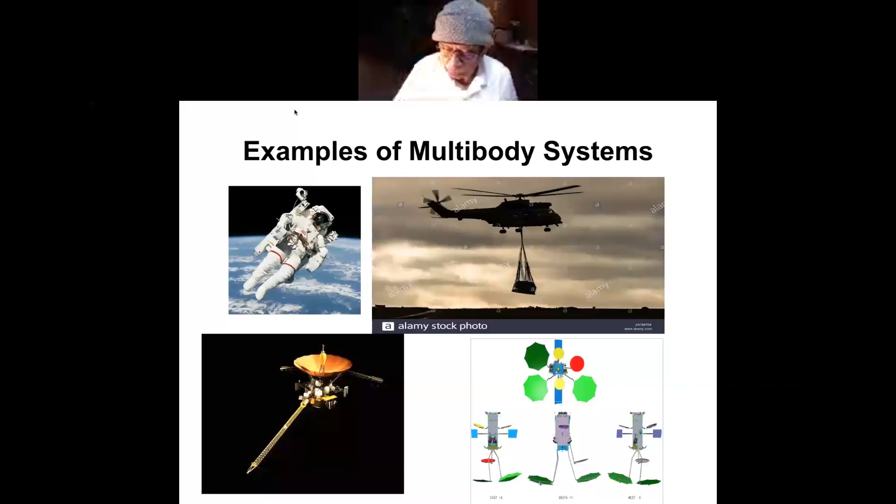So the next one I show: the main work of a dynamicist is that of formulating equations of motion of complex spacecraft. And the reason for that is before they are actually sent out, one has to know how it will behave. To do that, one has to simulate the motion of the system, and that means writing some differential equations, the solutions of which will show that behavior.

I mentioned here several methods that can be used to derive these equations of motion. First, I call the momentum principles. All it does is write the time derivative of the linear momentum equal to the force, and the time derivative of the angular momentum about the system mass center equal to whatever torque is applied to the system. So tracking the mass center of the motion is important. This is not necessary otherwise, because we have to take the moments about the system mass center.

In D'Alembert's principle, it is the same as the momentum principle, except that, as D'Alembert said, the force minus mass times acceleration is a zero-sum vector, and similarly torque minus the inertia torque is also zero. So these zero-sum vectors, because they are actually zero, the active force and inertia force - you can take the moment of zero about any point. That's the importance. You don't have to take moment about the mass center. So tracking of the system mass center is not needed.

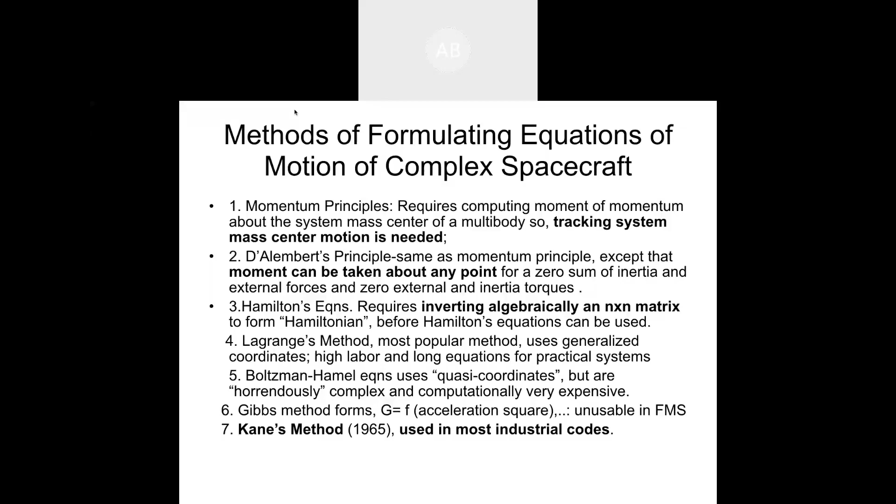Now, the example that I showed you, that I'm working on, with 6 reflectors and 2 solar panels, that has got 37 degrees of freedom. So remember, you have to invert this 37 by 37 matrix algebraically. That's a huge task - it will take pages and pages and pages. So this is practically useless.

Lagrange's method is the most popular method used in many places. But if you take up a complex problem, as I'll show you soon, the labor involved is horrendous, and the equations also have to be stretched out over many pages.

Boltzmann-Hamel equations are a special version of Lagrange's equations, where instead of using generalized coordinates, one uses quasi-coordinates. The meaning of quasi-coordinates is that the integral of these quasi-coordinates is not a generalized coordinate. So it's a linear combination of the time derivatives of the generalized coordinates that is called a quasi-coordinate. But this method is the most complex, if you see the steps involved in what is required. So this is computationally very expensive.

And the sixth method is due to Gibbs. Some people call it the Gibbs-Appell equation. And here one has to form a Gibbs function.

It is a function of the square of the acceleration. Now imagine you have a multi-body system and you have to compute the acceleration at one point in one body. It will have terms from the previous bodies also, so it will be a huge expression. Gibbs says, well, first form the square, and then it's a function of the square of the acceleration, and then he will differentiate it with respect to the quasi-coordinates of Boltzmann-Hamel.

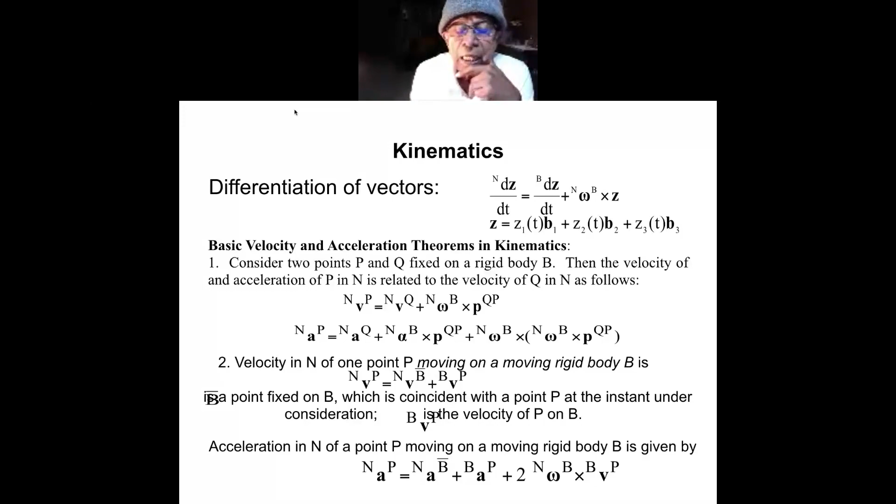The ant is moving, so it casts a shadow on the body B from time to time. Those shadow points are actually points of B, that's why I put a bar to say it's the velocity of the image point with respect to the Newtonian frame. Again, if you want to know the acceleration, you differentiate that with respect to the fundamental theorem on differentiation of vectors. You will get the last line, where the third term is recognizable as the Coriolis acceleration.

Then in the next slide, before I move on, I should say that kinematics is the most difficult part in dynamics. There is a lot of kinematics that I didn't go over, like how the angular velocity is expressed, I did not go over these things.

So suppose you take up this example: one rigid spacecraft G, which has 3 reaction wheels, W1, W2, W3, and it has got a nozzle for a thruster. FTh is the thrust force that the spacecraft needs to move.

And then there is a mass spring dashpot system, which you can think of as a particle moving over this moving body. As the mass spring dashpot causes the particle to move, that provides a case for a point moving over the moving body G. And then this slosh, fuel slosh, is shown as a pendulum attached to the axis of the spacecraft.

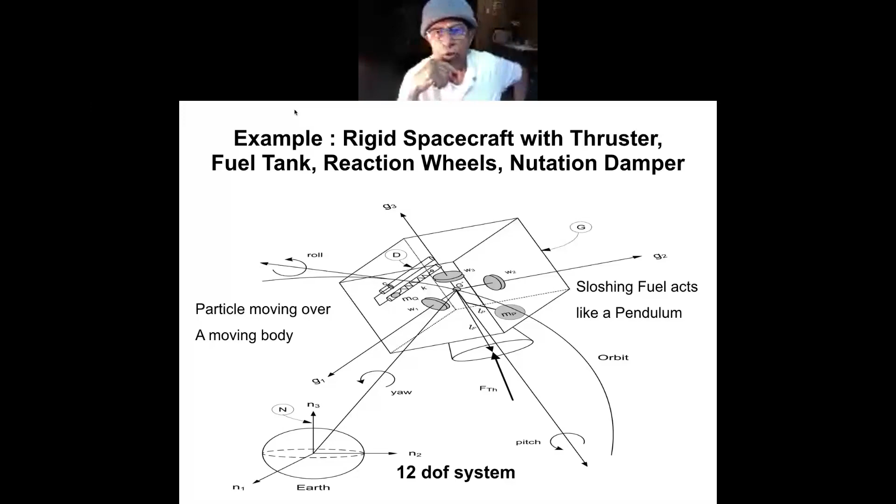Before I change the slides, I should tell you that these reaction wheels, W1, W2, W3, are used to control the attitude of the spacecraft. The spacecraft drives the wheel by a torque, and in return the wheel provides the reaction torque in the opposite direction - that's why it's called a reaction wheel. The spacecraft drives the wheel by a motor, and the motor frame, being the spacecraft, gets a reaction torque. So if you have three wheels, you have three-axis torque on the body, which is sufficient to change the orientation of the body.

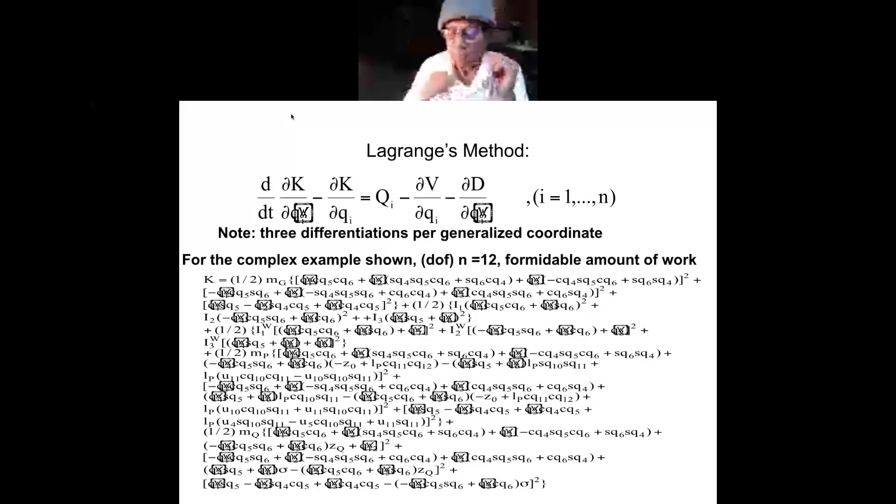So Lagrange's equation is a bad way to go for a large problem. In contrast, in other words, you cannot solve the problem with Lagrange's equations. If you use Kane's method, you will get the result. And I've given some nice examples.

Suppose you have a pencil which is spinning about the axis of the pencil. In the example problem that I have, we wrote a paper on this.

The minimum axis of inertia is B2, the second axis of the body. Now, if you spin it about the minimum axis of inertia, which is along the length of the pencil, then due to dissipation provided by the nutation damper, the spinning pencil will start to slant, forming a cone. The cone will increase, just like a symmetric top, and finally the pencil will fall down onto the ground and start rotating on the horizontal surface.

So for the minimum axis of inertia, you start the spin, but the object is unstable and goes from spinning about the minimum axis to the maximum axis, which is the transverse axis of the pencil. So it will start rotating on the flat plane, turning about the maximum axis.

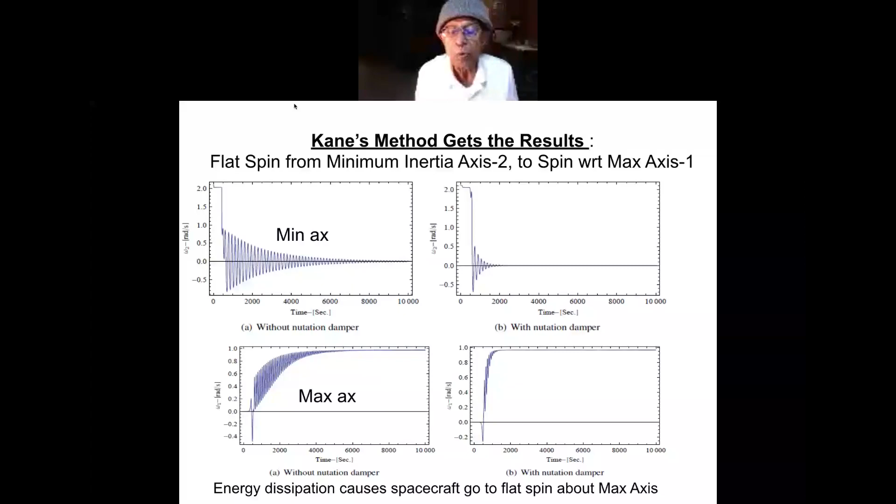If there is no nutation damper, it takes a long time to reach its final spin rate. If there is a nutation damper, the final spin rate is reached sooner, and energy dissipation causes the spacecraft to go to flat spin about the maximum axis. This is a very interesting result in spacecraft dynamics.

Sometimes, when you carry fuel, the fuel invariably has a viscosity, so there is damping inherent in it. So you do not specially need a nutation damper to get this kind of behavior. This was predicted in 1965, and it indeed happened.

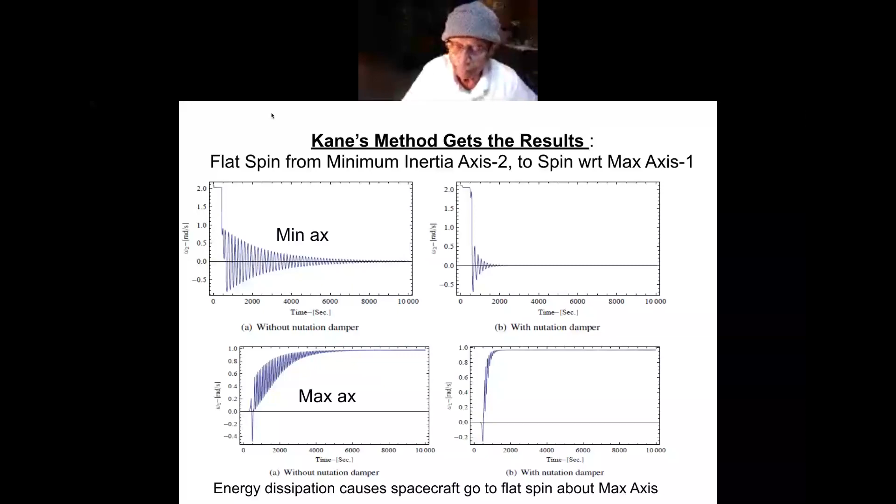Now suppose you want to reorient a spacecraft from one direction to another. To do that, you have to write these equations of motion for the system and solve it, and then it will teach you how the system will behave.

Suppose you want to maneuver the system from when it is rotating about a maximum axis, which in this case is axis 1, and axis 2 was the minimum axis of inertia. Suppose you want to turn the spacecraft from rotating about maximum axis 1 to rotation about maximum axis 3. So basically, you are requiring a 90-degree turnover.

The solution of the differential equations describing the equation of motion produces these three curves: how the maximum axis inertia behaves, how the medium axis inertia behaves, and how axis 2, the minimum axis, behaves. Axis 2 falls into flat spin, so its magnitude is 0. The 90-degree rotation is shown here.

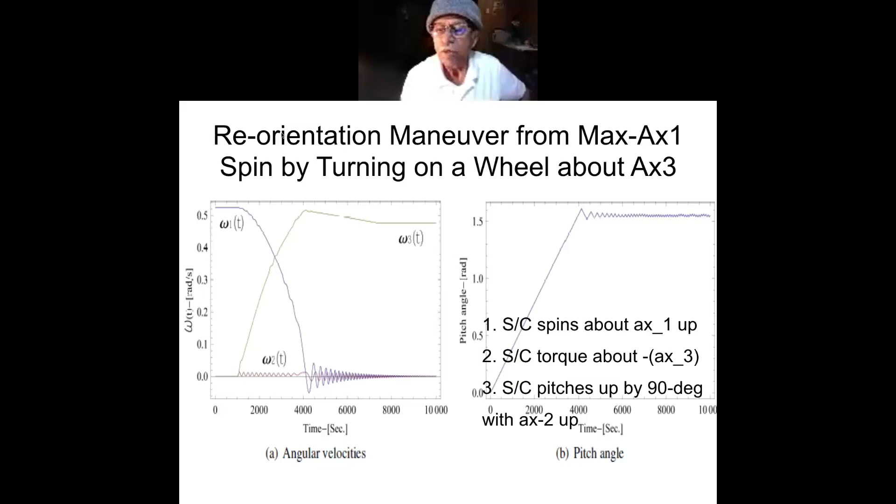The spacecraft first starts spinning about axis 1 with axis 1 up, then a torque is applied by the wheel. This is done by turning a wheel on. If you turn the wheel on in a certain direction, the wheel will impart a negative torque onto the spacecraft. So by turning on the wheel about axis 3, the spacecraft torque will be applied in the minus axis 3 direction.

The spacecraft pitches over by 90 degrees and reaches axis 2, which will eventually make it fall down. All these things were predicted by the simulation.

Next, I wanted to show that Lagrange didn't get the solution, but Kane's method did give the solutions. I want to tell you what Kane's method is.

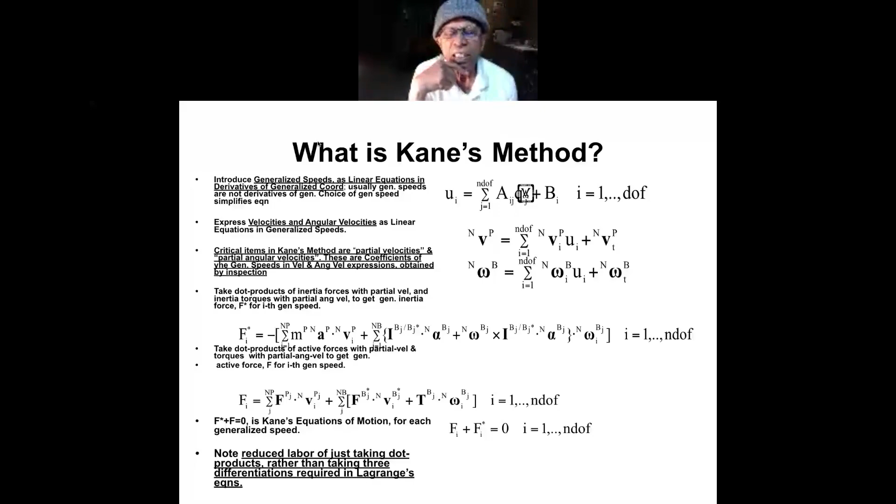Kane's method starts by defining a quantity he calls generalized speed. Lagrange uses generalized coordinates. Kane uses a speed-type quantity, using the symbol U, with subscript I indicating how many degrees of freedom are in the system. For this spacecraft with a nutation damper, 3 reaction wheels, and a sloshing pendulum, we had 12 degrees of freedom, so you introduce 12 generalized speeds, U1, U2 through U12.

Having introduced this generalized speed, here is the relationship: UI, the generalized speed, is a linear combination of the Q dot terms. So AIJ times QJ dot, plus some other term B, which does not contain QJ dot. Whatever contains QJ dot is AIJ QJ dot, plus B, and this is equal to the ith generalized speed.

Kane says to form the velocity of the particle using those generalized speeds, and it will be seen that if you express the velocity of a point P, it will be the generalized speed times a certain quantity, written as VPI with respect to n. This quantity VPI is called the ith partial velocity of P in n.

This is a strange creature. It is the coefficient of the ith generalized speed in the velocity expression. So if you write the velocity expression involving these generalized speeds, you get terms with U1 through U12, etc. The coefficients of U1, U2, U3 are what Kane calls the ith partial velocity, if you collect the terms in the velocity expression having to do with UI.

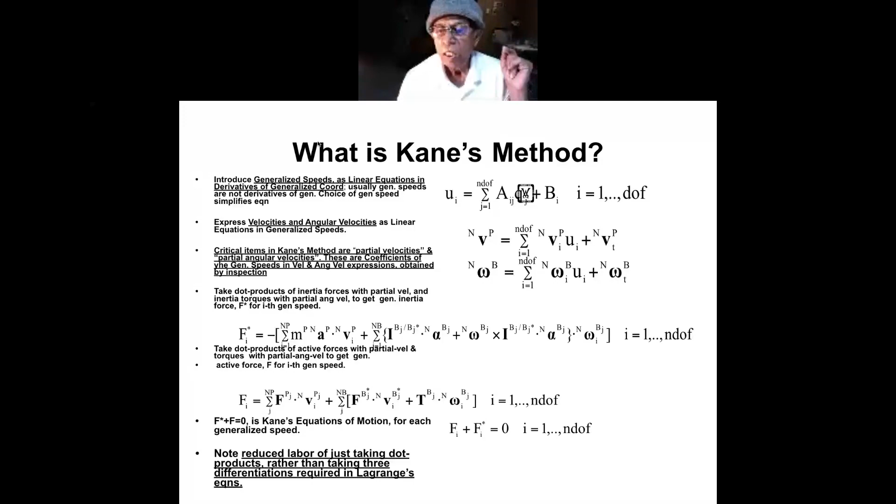You just take dot products to form the generalized inertial force and generalized active force, and you have to remember how you form the partial velocity. These are the coefficients of the generalized speeds in the velocity expression. Partial angular velocity is the coefficient of the generalized speeds in the angular velocity expression, and the generalized speeds themselves are formed as a linear combination of the q dots.

So this is all about Kane's method. I'll show you now. Again, this time I take up the role of a teacher who wants the students to know the idea behind the methods. So here again the thing was all messed up.

Q1 is equal to, I take, here is this angle Q1 and there is the angle Q2. So I say, well, I'll take the first generalized speed as Q1 dot, this Q1 dot. The second generalized speed - you can say, well, I had initially told you that the integral of the generalized speed is not the generalized coordinate. I have violated that rule here, but wait and see.

Now I define the second generalized speed as Q1 dot plus Q2 dot. If you see that if I integrate U2 and if I integrate the right hand side, it will not be Q2 dot, but it will also have a Q1 dot. That is why this is called a non-integrable generalized speed.

So from these two equations, you can get the time rate of change of the generalized coordinates Q1 dot, Q2 dot. And one rule for experienced dynamicists is that you make the generalized speed expression as complicated as you can. It will pay off later - you'll get very simple equations. I won't go into that now.

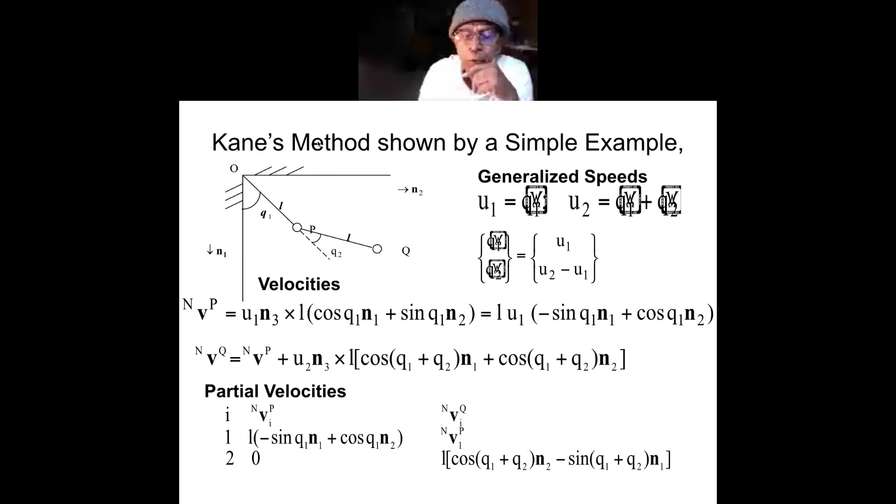Now, if I want to know what is the second partial velocity of Q, in this expression for Q, which contains this plus the big one, the first term from velocity of P does not contain a U2. However, U2 is present in the expression for Q, and the coefficient is N3 crossed with this quantity. That is what I've written as the second partial velocity of point Q. So Q has a first partial velocity and a second partial velocity, because there are 2 degrees of freedom - I is the degree of freedom. P has only a first partial velocity, no second partial velocity.

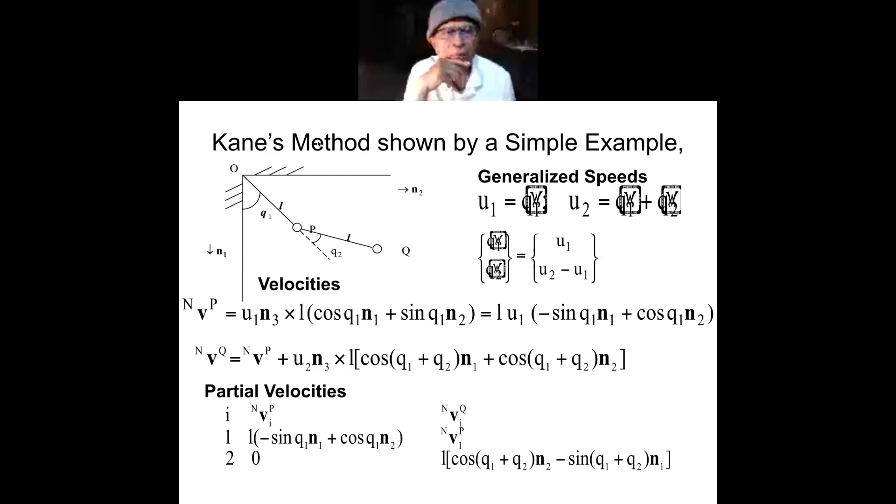Now, to proceed with Kane's method for this 2 degree of freedom double pendulum problem, first Kane says find the accelerations. So I just differentiate the velocity of P and velocity of Q, remembering the theorem that I said is the most important theorem of vector differentiation.

This, and then the generalized inertia force. The first generalized inertia force is the inertia force on P dotted with the first partial velocity of P, plus inertia force of Q, because remember there was a summation in the definition.

So inertia force on Q dotted with the first partial velocity of Q. These quantities that I formed in the table, the partial velocities. Similarly, for the generalized inertia force corresponding to the second generalized speed, it is inertia force times the second partial velocity of P, then again inertia force on Q times the second partial velocity of Q.

So step 2 forms the generalized inertia force. Step 3, first you have to know the forces. The forces are due to gravity on particle P and particle Q.

Now, generalized active force is called the force on P multiplied by the first partial velocity. If you want to form the first generalized active force, then multiply this system with the first partial velocity: force on P times the first partial velocity of P, force on Q times the first partial velocity of Q.

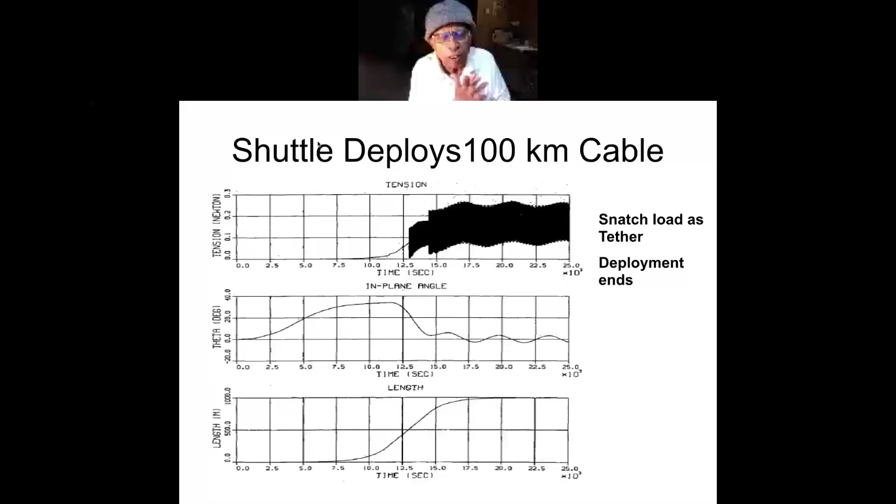And the tension, you see, goes, and then later there's a shady kind of band. Why? Because as you are bringing it closer, Earth's gravity wants to pull the satellite down. So you have to pull back, as though you don't want to let it go and let gravity grab it. So you are applying a brake, as though you are hauling it, putting tension onto it to bring it back. That's why there is a hash mark there.

So this is the snatch load. You're bringing it in as though you are braking it. You don't want to let it go away due to the pull of gravity. You want to bring it in. So in the beginning, there is not much, the gravity is not strong.

But towards the end, as you come closer, and in the previous version I showed, I have modeled it with many particles. As it changes from 5 particles to 4 particles to 3 particles, there is a snatch—I'm changing 5 to 4, 4 to 3, etc. So the tether tension behaves like this. Physically, you can think of it as pulling on it so that it does not escape.

Now, here I show the tether satellite retrieval. If you have played with a yo-yo, you will see that if the ball at the end of the string swings, then when you try to bring it in, the ball will try to wrap up on the wheel of the yo-yo.

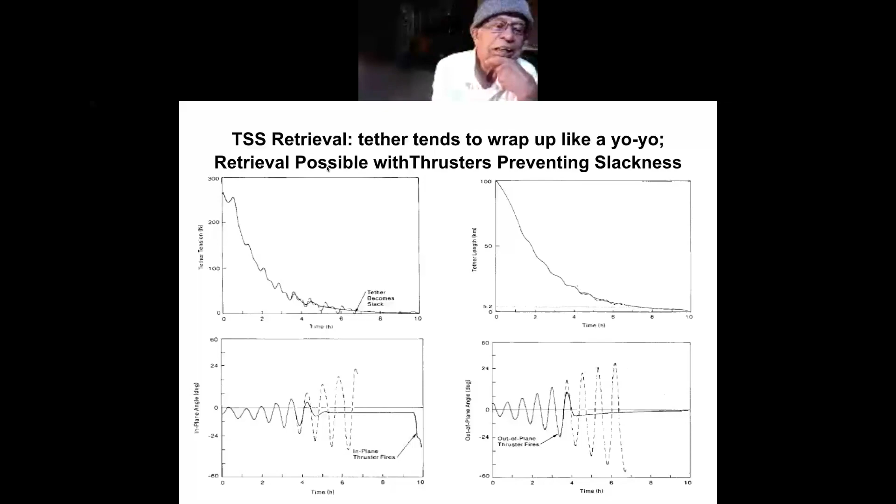Okay, so this is about tethers. Then another thing that I did was, again, based on reading Kane's book. I read Kane's book when I was at Florida. My teacher was a former student of Kane who was not a good teacher, he was just essentially copying Kane's class notes. But the good thing he did was he prescribed Kane's book.

And we had a small room. I had a small table with a table lamp. I can tell you, I did all the problems in Kane's book, and that's how I learned. So anyway, here's the problem.

The solid rocket booster was used in those days to push up a satellite. On top of the solid rocket booster, these satellites used to go, and after launching the satellite, the booster would fall into the ocean and be smashed into pieces because the water behaved like solid stone when the rocket falls from 60,000 feet or so.

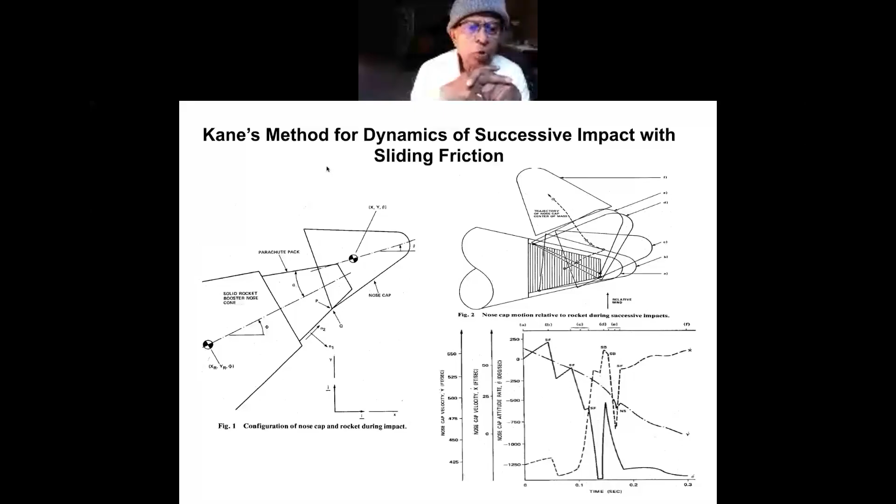So the idea was, is there a way to attach a parachute to the booster so that after it has thrown off the satellite it was trying to boost, the parachute would inflate and slow the descent of the rocket gently onto the ocean surface, and then a ship can go pick up the booster. So that was the big idea.

Now, how was the parachute involved in this case? They placed the parachute on the conical top of the rocket. There are layers of parachute packing there, and this parachute pack was encapsulated by a cap. Then there were 4 bolts that connected the body of the rocket to the flanges of the cap.

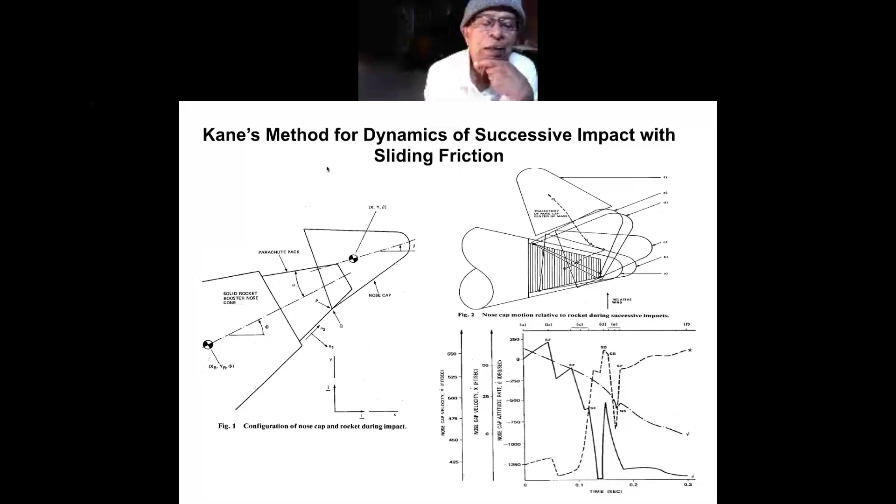Now these 4 bolts were blasted off, but no blasting would produce exactly the same instant, so there will be some sort of a kink. One bolt opens up some microseconds before the other. So it starts with a little bit of a tilt, and then it goes out onto the parachute in a ding-dong, rattling manner. When it rattles, it hits the parachute package and may dent it, producing a hole.

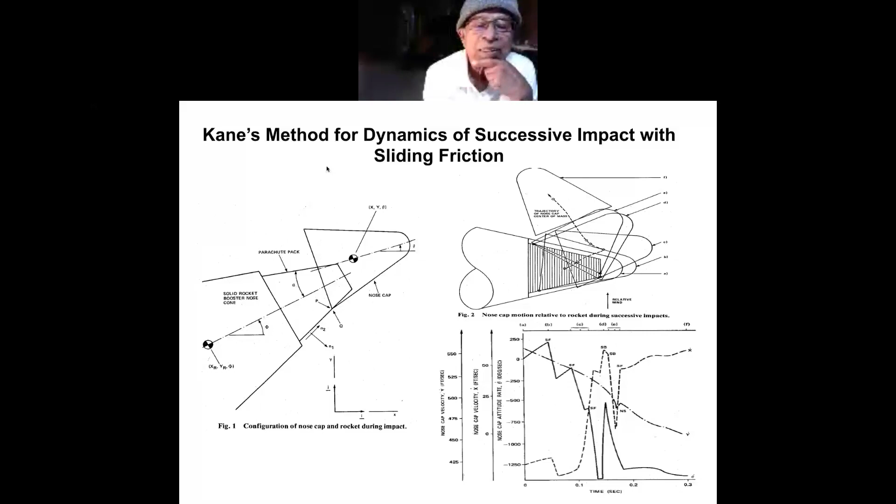And a parachute with holes is no parachute. So the idea was to have a cable on the inside of the nose cap, attached to the parachute package, so that as air gushes in to separate the cap away, the parachute will turn this way and that, and it may slide backward, slide forward, and then have a normal impact.

So one of my colleagues did the simulation. I wrote the equations, and he knew how to plot successive configurations. He plotted these things for me. You see, it shows the parachute in one instant was like this, and the final instance was like this.

So these are some successive time plots of the orientation of the nose cap, and this lower figure shows what was happening. There is a slip forward at that instant, then slip backward, and then no slip. No slip means normal bounce back, slip forward means it's a sliding impact in the forward direction, and slip backward means it's a sliding impact where the nose cone goes backward towards the booster, staying on the parachute surface.

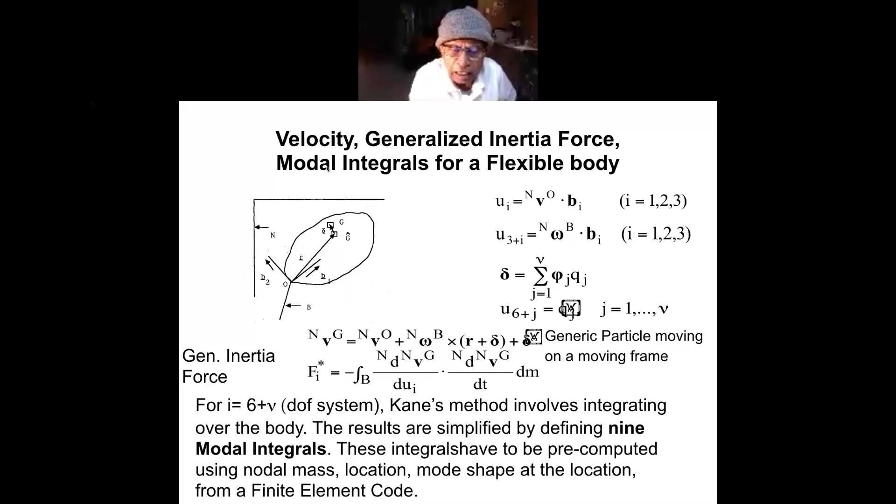And then generalized inertia force I do using Kane's formulation. This is mass times acceleration, dm times this is the inertia force with a minus sign. And I dot multiply by the ith partial velocity of that point. Ui is the ith generalized speed. If I do the dot multiplication of the inertia force with the ith partial velocity, I'll get the ith generalized inertia force. Now, in carrying out this integral, it turns out that the expressions are simplified if you can define certain constants.

These constants are called modal integrals. These are characteristically appearing entities in a flexible body dynamics math model. These integrals have to be pre-computed using a finite element code, which at any node tells you what is the nodal mass, what is the XYZ coordinates of that nodal mass, and what is the vibration mode shape at that location.

Using these 3 informations, you can define 9 modal integrals. That is there in my book, and of course, I am not going to tell them what they are now.

Now, there is a thing called premature linearization and subsequent correction. If large motion equations—by large motion it is translating and vibrating and rotating—if large motion equations are written for flexible bodies, starting with linear velocity or angular velocity, as it happens when using vibration modes. See, vibration modes come out of an eigen problem, which is based on linear mass and stiffness matrices. So vibration modes are gotten out of a linear theory. So if you use the linear theory in the velocity expression, then those equations are said to be prematurely linearized, and it will produce an error.

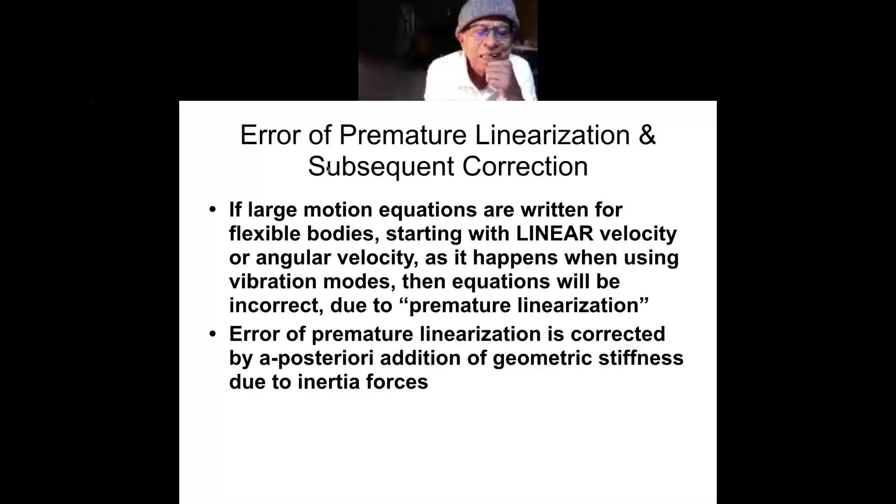There is more to go about it. Suppose you have a turntable of radius r, on which there is a massless rod, at the end of which there is a particle of mass m. Now you can write the velocity of this particle, and in that expression there will be sine q, cos q kind of things. Now if you neglect the sines—not quite neglect, but say sine q is equal to q and cosine q is equal to 1.

If you do that in the nonlinear expressions for velocity, you will get this expression that I write here with a tilde: velocity of p in n with a tilde. That means it is linearized. My tilde sign means it has been linearized, assuming sine is equal to the angle itself, cosine equal to 1.

Now if you use either Kane's method or Lagrange's method—because Lagrange's method can handle these simple problems—you will get an equation like this. What it says is, here you have U1 dot. U1 dot is equal to Q1 double dot. U1 was taken to be Q1 dot, so U1 dot is Q1 double dot. And this term you can recognize something with Q, like an effective stiffness term.

Normally with a pendulum you have minus K by ml square. Now here there is a subtraction by minus omega square, which says that with rotation, the stiffness decreases by the square of the rotation speed. Omega is the rotation speed. Now, that is a physically incorrect thing. When you turn a table, the rod would want to stay straight due to centrifugal forces. It will be harder to change the angle, Q1.

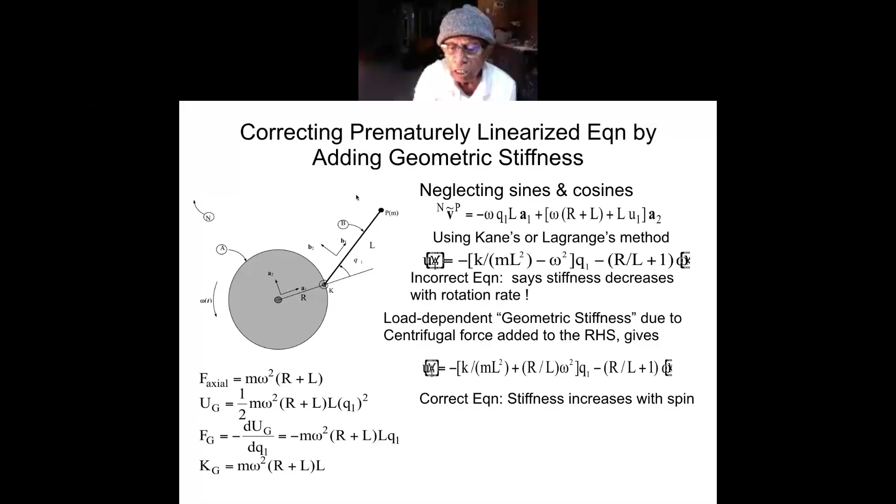Now you see something is added to the natural frequency. So it is becoming stiffer with speed, and that is what physically happens. Stiffness increases with spin.

Now, we tried that process with a cantilever beam attached to a shaft, where the shaft is being spun up to some steady state. This system has got some natural stiffness, EI by L kind of thing for a cantilever beam, and then you compute the geometric stiffness due to the inertia loads, since the inertia force is distributed.

If you compute that and have it ready, then if you spin it, you will see that the beam wants to stay straight. Inertia, in another way, is called laziness. The beam is lazy, it doesn't want to go with the rotor. So when the base moves up, the laziness of the beam, or the inertia of the beam, causes it to stay back, and so the deflection increases. Then the beam rather reluctantly catches up and oscillates like this.

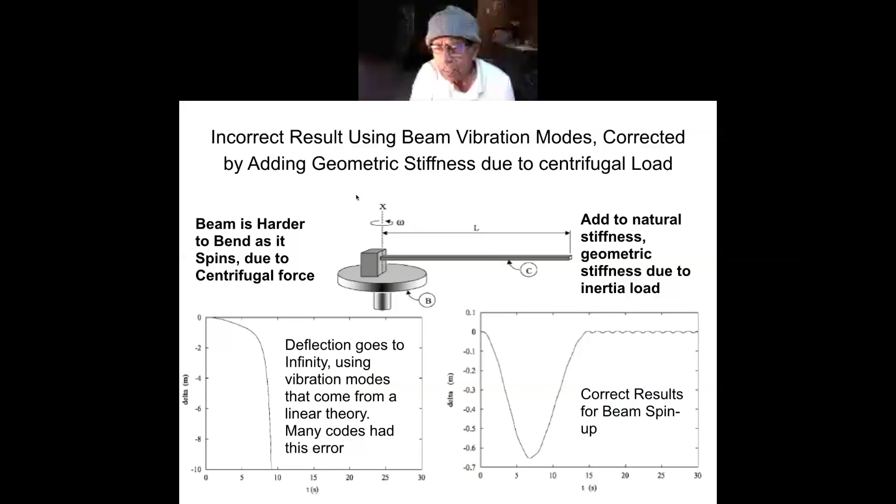So this is the correct result of beam spin-up, obtained by adding to the incorrect equations from premature linearization the geometric stiffness due to the inertial load. If you don't add that stiffness, this is what will happen: the deflection will become unbounded.

I did the same thing on a plate. I wrote this paper with Professor Kane. Actually, the beam paper was also done with him. Kane had called me from Florida, and that's a long story.

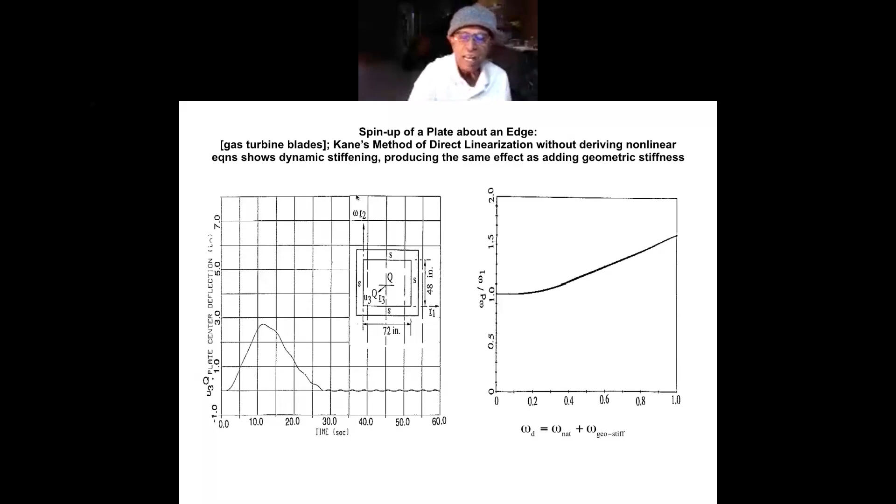We also plotted how the dynamic stiffness, the ratio of dynamic stiffness to natural stiffness, varies with speed. And this is the curve. It becomes stiffer with spin.

Then I did another formulation for an experiment that NASA and its scientists wanted to do. The program was called WISP, which stands for Waves in Space Plasma. I don't know what they wanted to do with it, but I know the mechanism they needed. 150-meter long beams were attached to the shuttle bay, and the shuttle was asked to yaw, meaning rotate perpendicular to its axis, at a yaw rate of 1 revolution per 1200 seconds.

So it's a slow rotation. Now, if the base is slowly rotating and it's a thin tube, 150 meters or 450 feet or so long, you can see that it will have large deflections. The base is attached here, and the tip, 150 meters away, will bend quite a bit.

How I modeled it: here is the shuttle, the square that you see. I broke the beam into rigid segments and connected them with torsional springs. I wrote the dynamics of this using a procedure called order n. It's called order n because the arithmetic operation count for that formulation varies with the number of degrees of freedom, or how many cuts you've given to the beam.

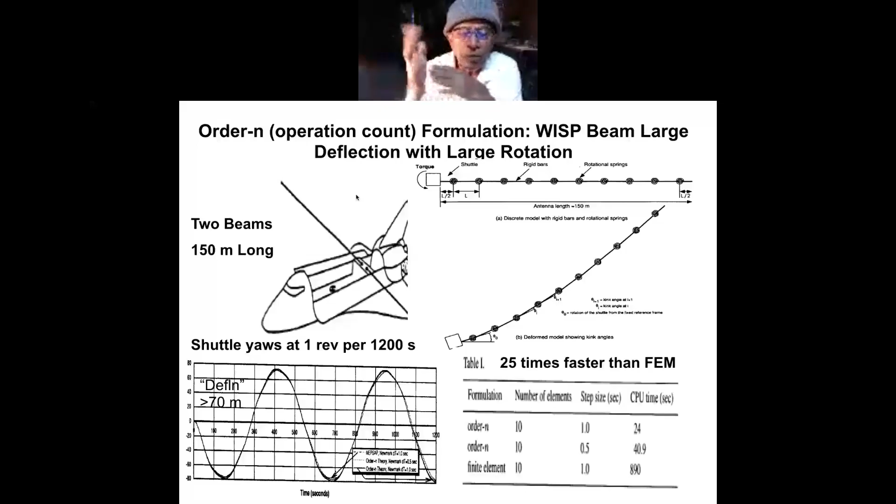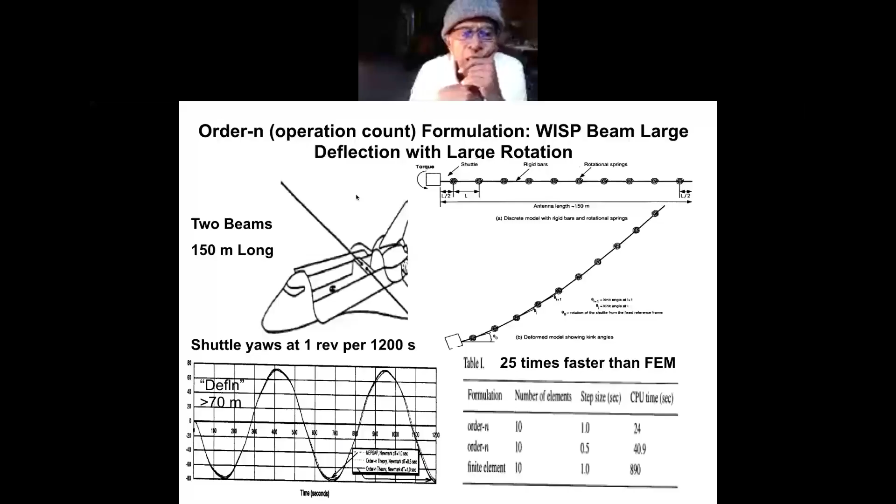Now, typically, because the deflection will be large, this goes beyond linear theory of elasticity, and one has to consider nonlinear theory of elasticity via finite element codes. Two of our guys had PhDs in civil engineering from Berkeley, and I worked with them on this problem. I did it using rigid rods connected by springs; they did it using proper nonlinear finite elements. I don't know anything about nonlinear finite elements.

We produced results from our two codes, and you see it plots the deflection. Deflection reaches about 70 meters, or a little bit more. So for a 150-meter long beam off the original axis, the tip moves by nearly 75 meters or so.

The interesting thing was that the crude model of rigid rods connected by springs and the sophisticated model of nonlinear finite elements essentially agreed. But on computation time, my order-n formulation was 25 times faster than the finite element model simulation. It's a complicated algorithm that I did not generate myself.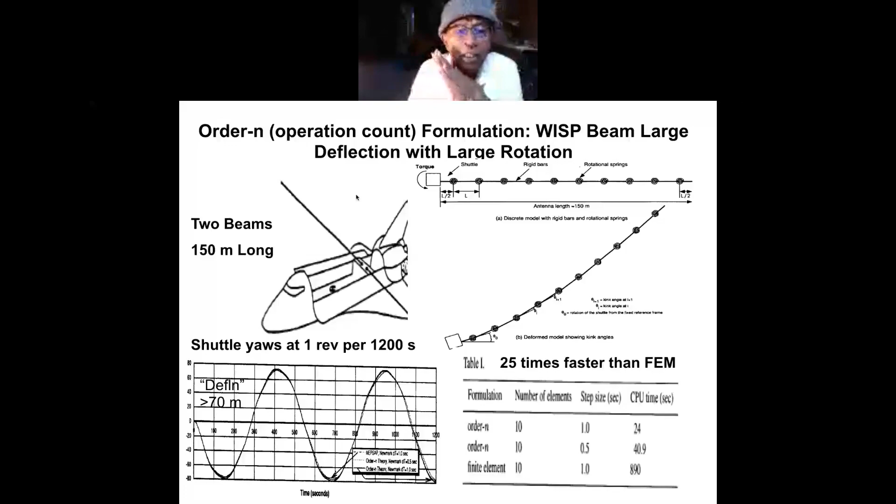It was generated by one student of Professor Kane called Dan Rosenthal. I just used his method for this problem.

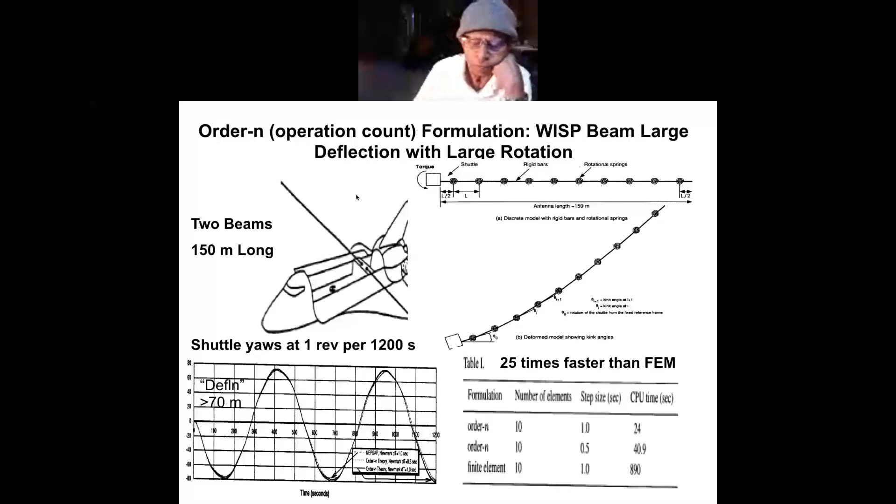It's a recursive algorithm, 3-pass recursion. And this is my major work in my life: flexible multibody systems. If you write the equations of motion of a system of bodies containing many flexible bodies connected as hinges, using Kane's method, you will get...

I'm quite vexed by the markings on my slides. So the equation is mass times u dot. Remember, u is generalized speed, so u dot has the dimension of acceleration. It's basically mass times acceleration equals force, just to give you an idea of the physical entities—it's not really physical mass times physical acceleration. So mass times derivative of the generalized speeds equals the right hand side.

If you apply Kane's method directly, this mass matrix is a dense matrix and it's time varying. So if you have a 37 degree of freedom problem, the operation count will be 37 cubed, or if you have a 12 degree of freedom problem, it's 12 cubed. So decomposing and back solving will be quite expensive as you go to higher degrees of freedom.

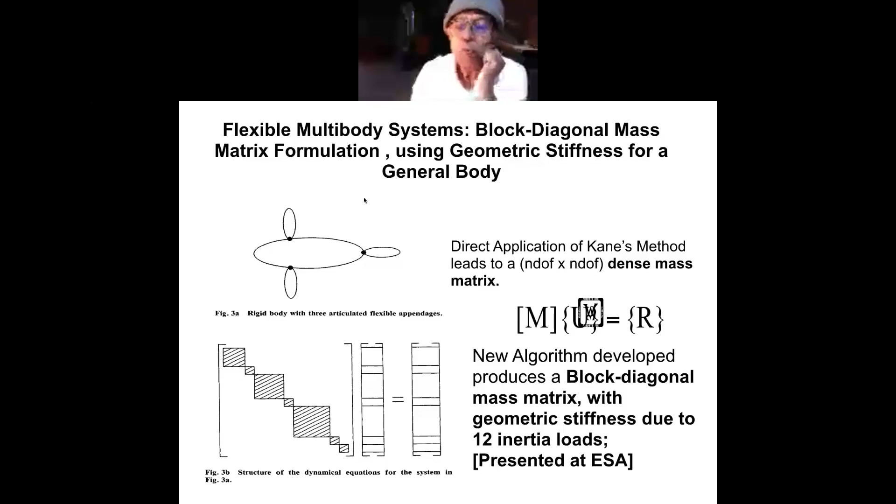That's what my friend from UC Berkeley, a civil engineer, taught me—how to compute geometric stiffness due to inertial loads. I told him these inertia forces arise, and asked can you tell me how to get this geometric stiffness? He said, well, I'll go to my general model, put in your inertia loads. Inertial loads come from rigid body guys like myself. So we produced a set of geometric stiffnesses in formulating this equation, and there is a special algorithm, backward and forward, for this.

So for example, for this 4-body system, you may have a first body with a 6 by 6 matrix, and then some rotation angles for the first flexible body. So you see a small submatrix followed by a big matrix in order, and the lowest submatrix is the 6 by 6 matrix for the bus.

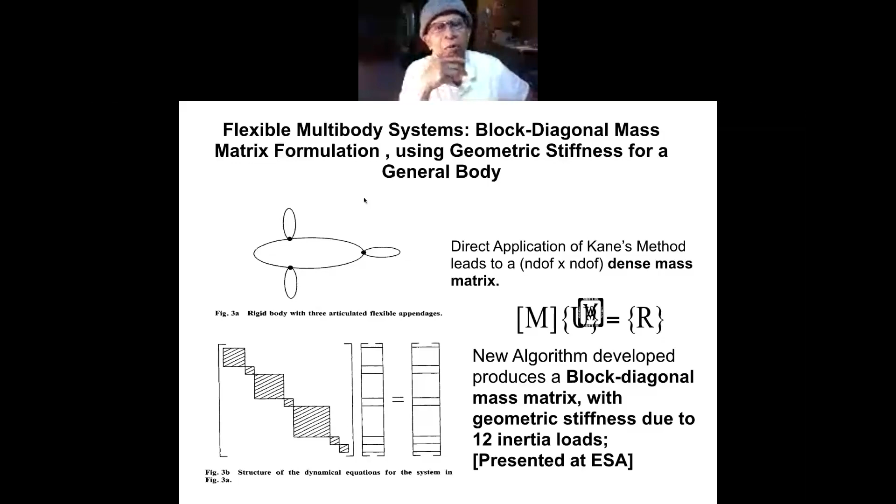And then I also had a constrained block diagonal formulation. This theory was tested against a lab experiment. The idea was to see the unfurlment of an antenna.

Here is this dish-shaped antenna, made out of ribs which were segmented. Each segment was made up of several parts. Each part was connected to another by torsional springs. So these are tapered beams divided into many parts, each part connected to its neighbor by torsional springs.

And this antenna has cables or wire meshes moving. Initially it is stored into the spacecraft, like a package wound up around it, and there is a stop that stops the wrapping around of the ribs. Then the stop is released, and it just opens up like an umbrella opening, and as it opens up, there are some torque loads applied to the attachment.

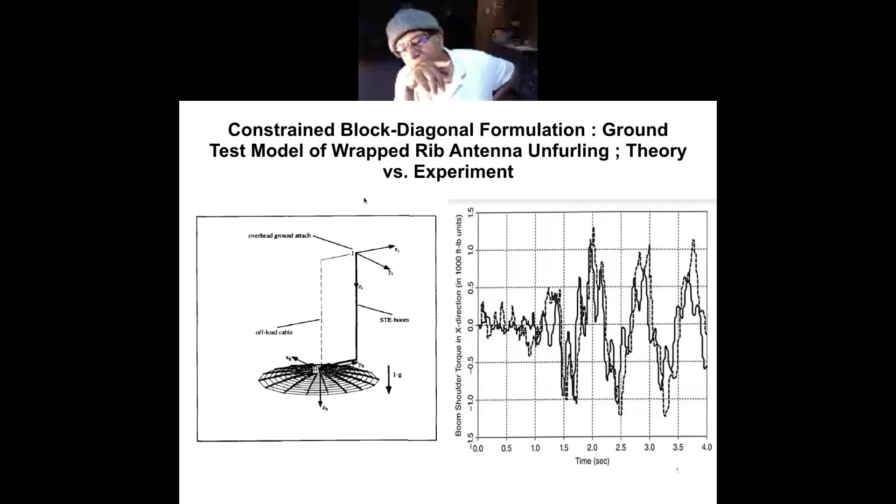I also went to study a thing for the Naval Postgraduate School. The idea was there was a ship that would deploy, by means of a cable, a sonar device that would send out signals to detect if there are mines deployed on the sea bed. If there's a mine and the ship comes over it, it will blow up the ship. So to prevent damage, they send a sonar device by cable to find out where the mines are, and if it is damaged, only this inexpensive device gets damaged. It has a control system which tells where to go to search for these buried mines.

I worked on this with a Vietnamese PhD person from Stanford. By the way, the city I live in is where Stanford University is located. He plotted successive time plots of the shape of the cable, so it forms a C-type shape, or an inverted J-type shape, and the cable deployment length was like that.

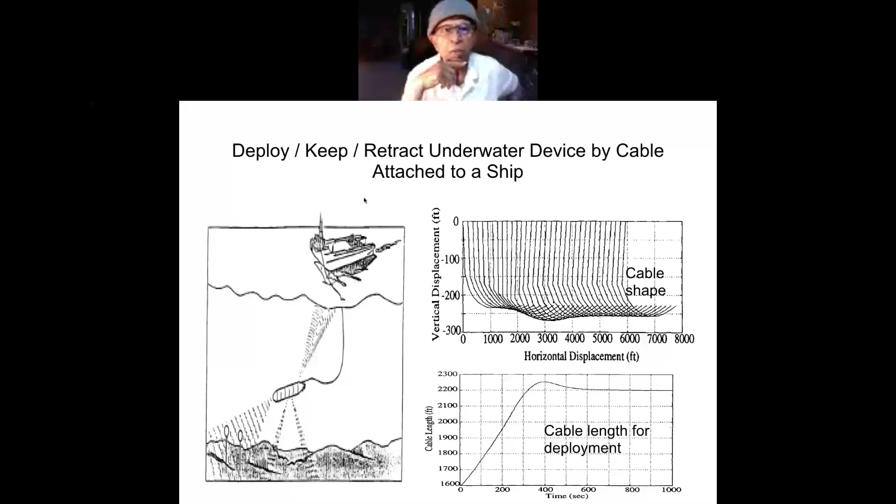Now I show the dynamics of a rocket, including geometric softness in this case. Why do I not speak of geometric stiffness?

It's because the engine gives thrust to the rocket body, which pushes it forward, and then the inertia force due to that push is in the reverse direction, because inertia force goes the opposite way to the applied force. So the thrust force pushes one way, and the inertia force goes the reverse way. These two forces are equal and opposite, and they compress the rocket. If the rocket is small enough, these two forces can cause it to buckle.

In fact, that is what happened in many rocket flights - the rocket bursts out at the launching pad due to this stiffness. Because this stiffness is compressive, it actually makes the structure softer. That's why I've called it geometric softness rather than geometric stiffness. Geometric stiffness, as I told you, is always associated with a load.

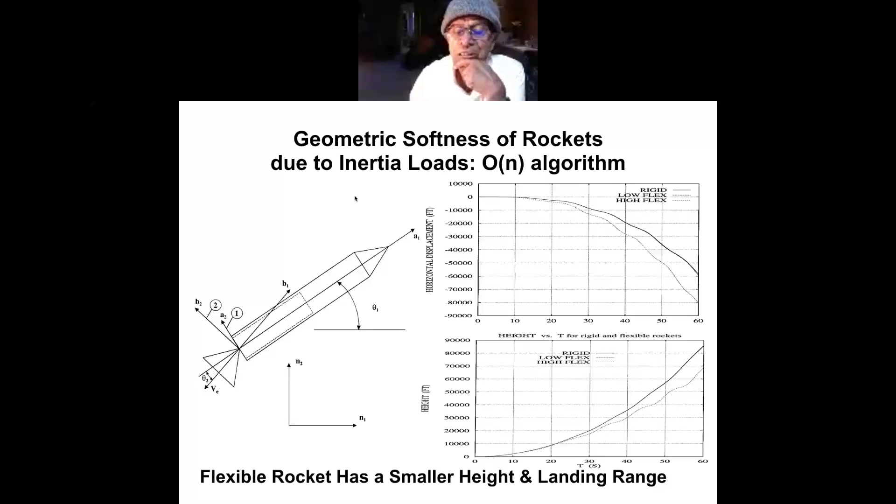It is a greater distance, and also in terms of height, different things are happening in the two cases - the rigid body model reaches higher. So if you want to hit an enemy plane flying at 90,000 feet, you could do that with a rigid body model, but that's unrealistic - no rocket is a rigid body. In a real, flexible body situation, the rocket will not be able to reach the plane you want to hit. So you better have a flexible body model to know if the rocket would actually hit an enemy plane flying at 90,000 feet - it does not go that high.

In height, the flexible model is less. In range, horizontal range, the landing distance is greater. So there is a mistake. Yes, smaller in height and lower in landing.

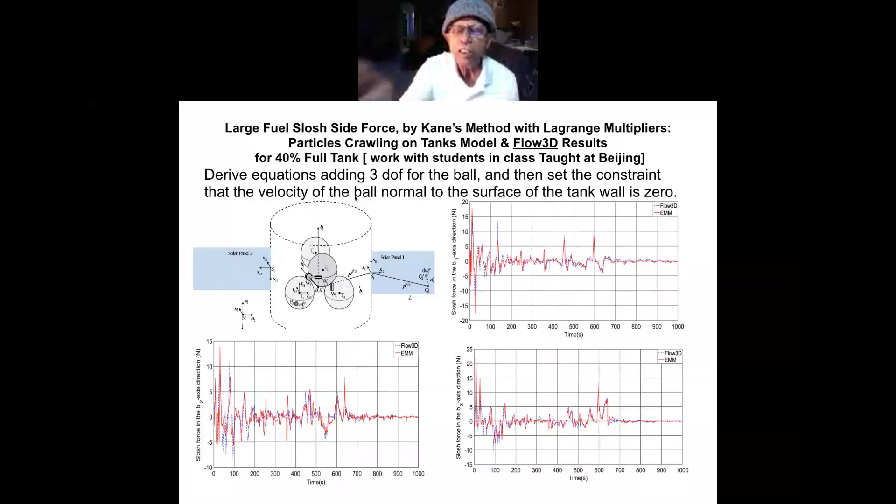The last problem that I considered was, actually I went to Beijing Institute of Technology as a visiting professor, and I taught the students a method which is an extension of Kane's method called Kane's method with Lagrange multipliers. Again, this method was not developed by me, but one of Kane's very old students when Kane was a young man. It's called Kane's method with Lagrange multipliers, and I taught them how to use this.

And the spacecraft contains like this: there are 4 tanks, 2 stubby solar panels, and reaction wheels. On these tanks there were fuels, and as the thing rotates, there will be large fuel slosh. If you think of one of the petroleum tanks that move about in Calcutta, they have the fuel inside them sloshing back and forth and hitting the wall.

So they have to be careful about it. Here, the large fuel slosh puts a side force. That side force is a disturbance to the spacecraft. If it wants to point in that direction, and there comes a side force because the liquid hit the wall, then that disturbance will cause a blurring of an image if the spacecraft is taking images.

So I showed them the method of how Kane's method with Lagrange multipliers works. These Lagrange multipliers tell you that I assign some 3 degrees of freedom at that point of the particle. The particles are supposed to be crawling around. This is the model: the fluid is modeled as a particle with 3 degrees of freedom.

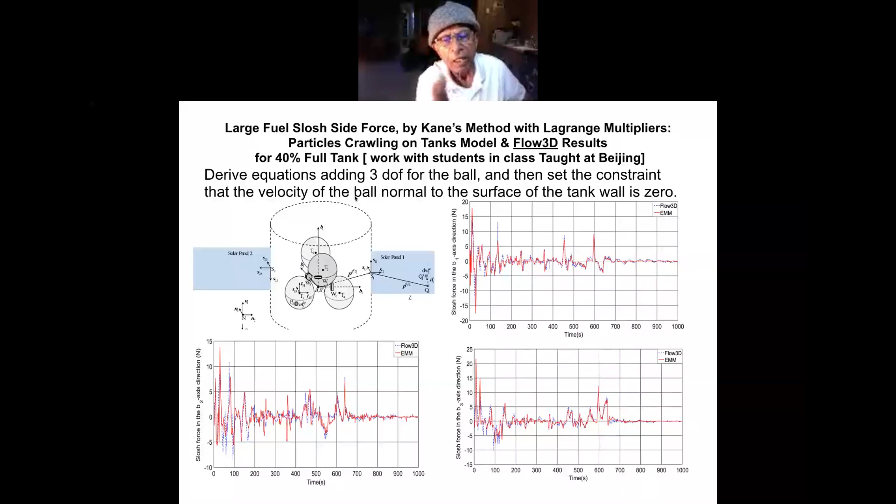With that, the particle cannot dig into the surface of the wall. That's the constraint. And because of that constraint comes one Lagrange multiplier per tank. So the whole physical idea is that I will not let a particle dig in. It can go up, it can go tangentially, but not normal to the wall.

So if you apply that constraint, which comes through the use of Lagrange multipliers, on a crawling particle, again this is a particle moving over a moving body. So that's why I said it's a very basic theorem.

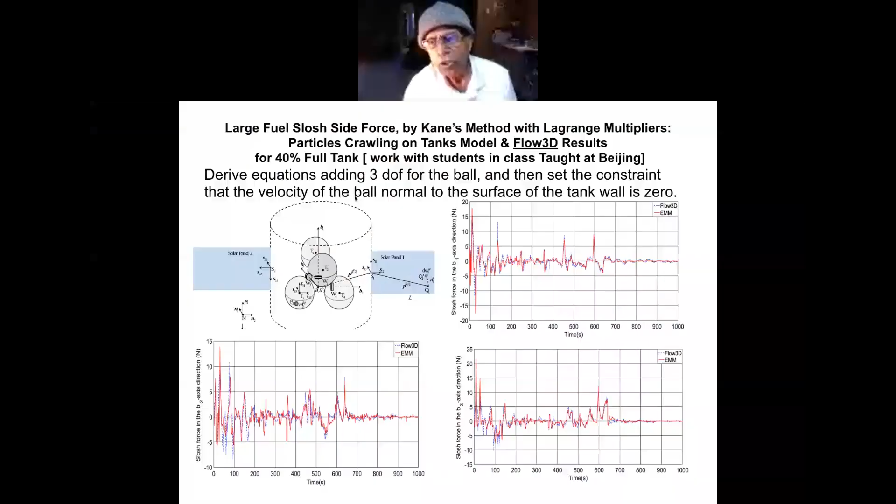The results were computed by my students and the professor at China. Because I left, they completed the theory and validated it against a commercially available code called Flow 3D, a three-dimensional fluid mechanics code. Look at the beautiful match between the equations of motion model with Lagrange multipliers and what the computational fluid dynamics model predicted. You see a beautiful match. So that's practically the end, and this is my last slide.